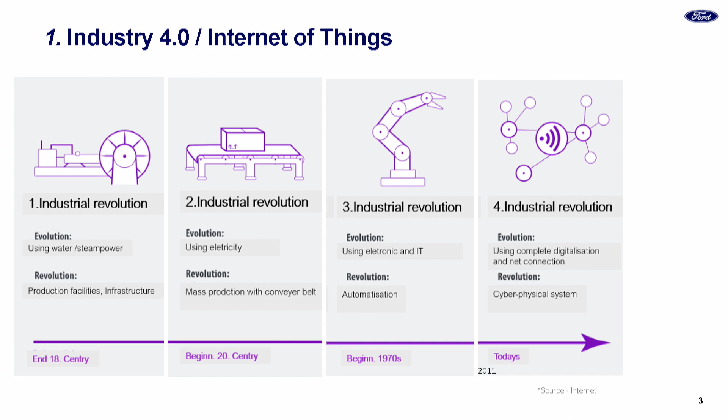Now the European Union is defining Industry 5.0. The background is industries are focusing very much on economical growth, efficiency, and productivity. But with time, we are recognizing there is something missing - where are human beings in that technology. And we are recognizing there are limitations of planetary resources and so on.

That's why the European Union defined Industry 5.0. Yesterday there were a lot of sessions with that definition, but to summarize it, Industry 5.0 is, in my opinion, not really a technical revolution, but more complementary to Industry 4.0. We are defining the focus areas.

So the first focus area is sustainable - sustainable leads actions on sustainability and also respects planetary boundaries. The second focus point is human-centric, meaning it promotes talents and diversity and empowerment to the people. And the last focus area is resilient - that means resilient, agile, with flexible and adaptable technologies.

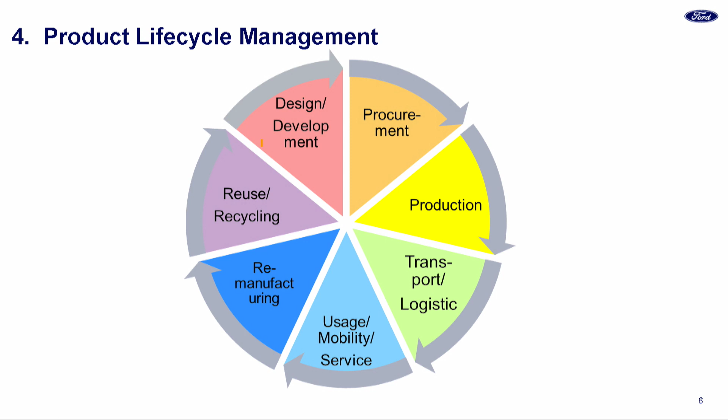Now let's speak about the product lifecycle. If we talk about the product lifecycle, we are starting design phases - 11 o'clock direction if you see in the circle. So we are starting design of the vehicles, and parallel to that is running the procurement. And if we produce the vehicle, and the vehicle is transported to the customer, that's the blue color now, and then if the customer uses the vehicle, the parts are remanufactured or recycled.

That's closing the cycle. So during this lifecycle of the vehicle we have a lot of data, but we are not using this data completely. It is not even connected, those data. So if we can connect those data at each lifecycle stage, we can have a lot of benefits and have a very robust product lifecycle management.

So there are some practical examples I will go through - generative design, and also in the production phases, AR, VR, different things, and different technologies, especially AI and blockchain or wireless communication that go through the whole lifecycle. So let's start with the example of generative design.

What is generative design? Generative design is autonomous geometric design after specification and constraints. There are three categories: first is topology optimization, second is biomimicry, third is morphogenesis.

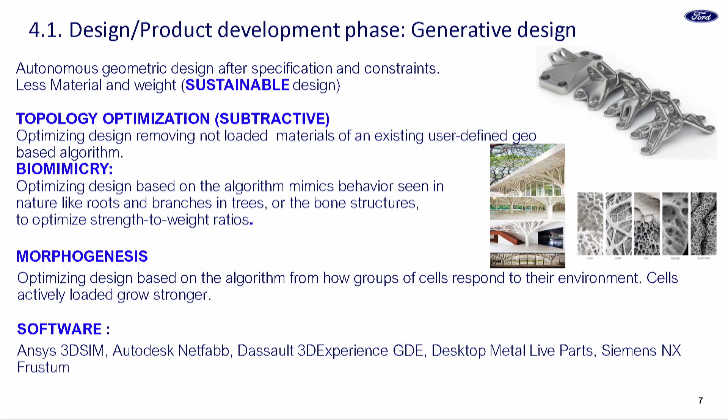And the second example is biomimicry. Biomimicry is optimizing our design after nature's behavior - it's like tree or leaf structures, or bone structures.

And the third category, morphogenesis, is a little opposite to topology - we are adding material if the area is loaded. So it's more additive rather than subtractive. You can use different software, listed at the bottom, and then you can create these designs. Because this design uses less material, it is very sustainable.

But these designs are sometimes very difficult to produce with our conventional production method. So now that is where additive manufacturing comes in. 3D printing, we're talking about here first.

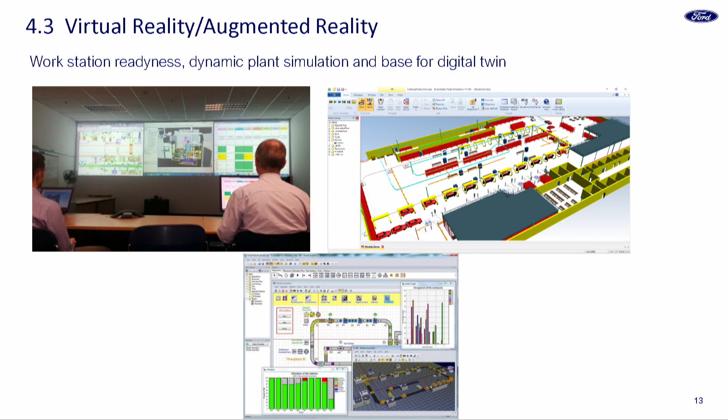And this is all the basis to make a digital twin. I will quickly go through it - it is a very complicated process, but it will need also, each process has some iterations.

I started with what is required in the digital twin. Digital twin requires a complete and granular virtual representation of the actual thing. So how do we do it? We're talking about a lot of digital twins, but generally we can have the product digital twin, we can have a production digital twin, and then after that we have the vehicle digital twin, how our vehicles are moving on the street.

So I'm focusing here more on product digital twin, but normally before you can do production digital twin, you need to have product digital twin. So if we have a virtual product - CAD models, everything - then you have simulation, and you are testing the product and verifying your virtual model through testing.

But parallel to that, you need to make sure this product you are testing, you can produce it. It is high level - you're doing production testing and also simulation. Then you have 3D factory models where you want to build your factory, and then verify the production simulation you have done, assessing it at a high level. You also get models from the supplier, the machine dynamic models. You put that all together, along with whole process workstation analysis, and then you can get all the digital twins, dynamic digital twins, as a virtual model.

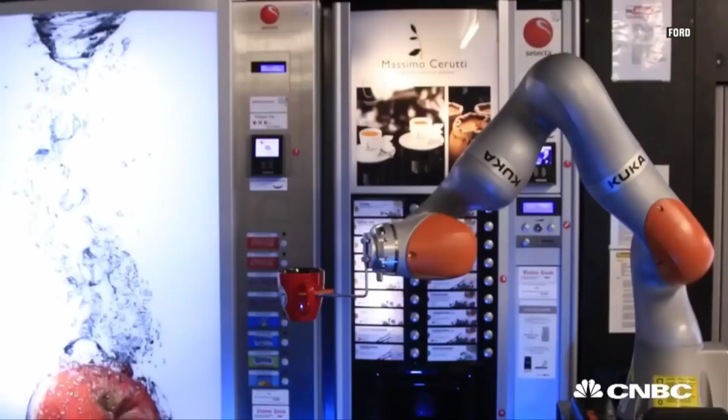And so even they can drink coffee together.

Okay, the next example is our AGV at the Valencia engine plant. Eduardo is also here, so this example we will show you.

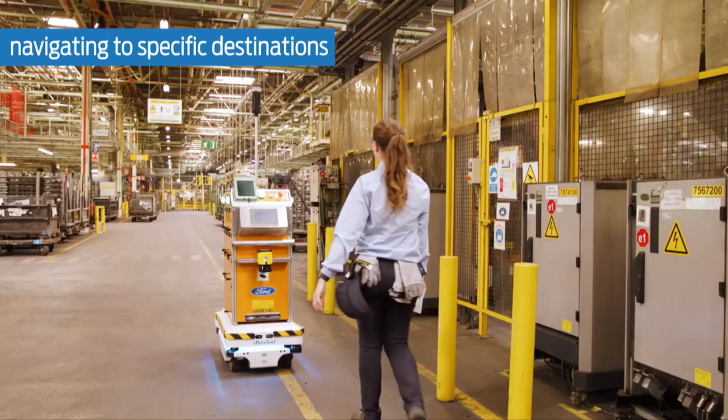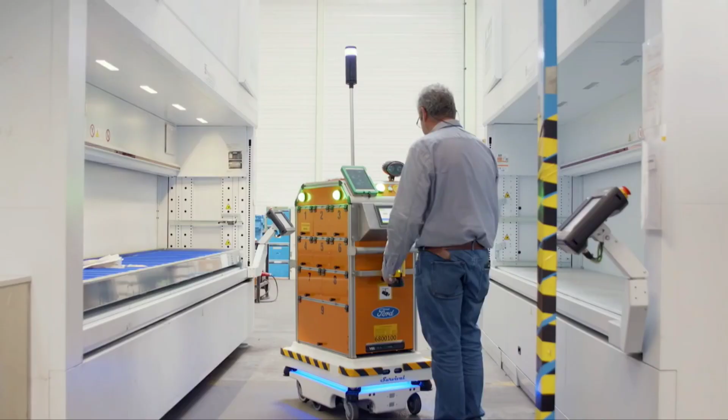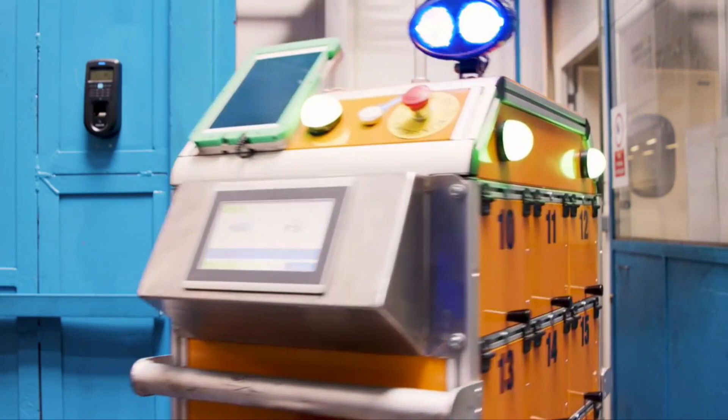Okay, then we have an example - the drone, which is applied to the Dagenham engine plant. What if you could do potentially dangerous but essential tasks absolutely risk-free?

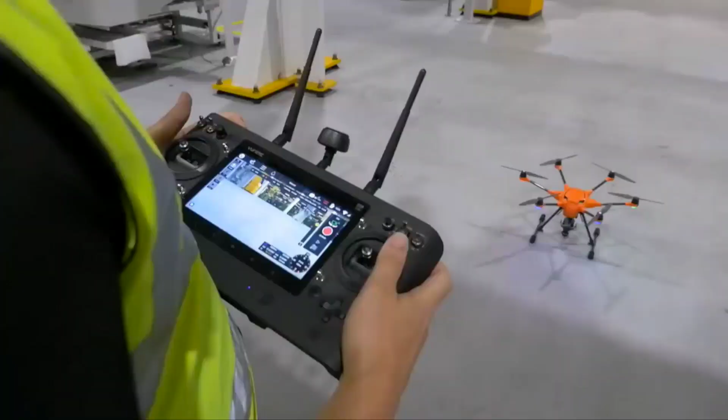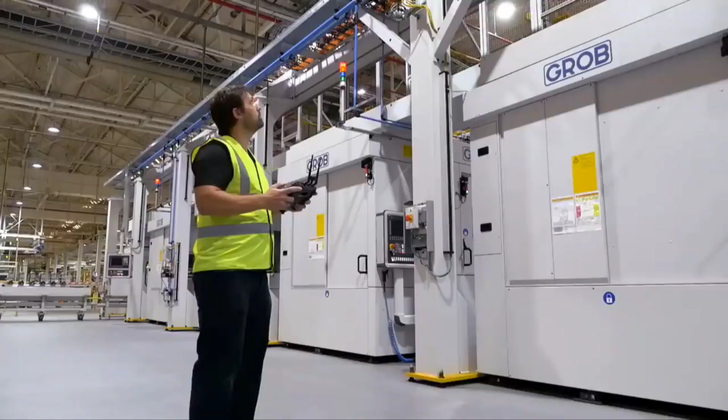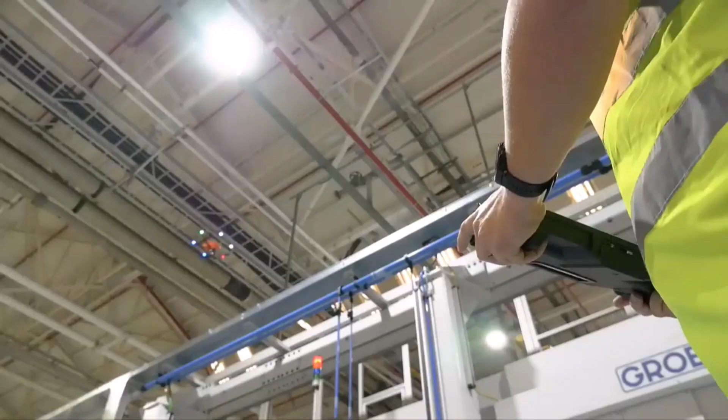A group of Ford workers are flying drones around their factory to do just this. To carry out vital safety inspections of high-up or hard-to-reach places, Dagenham engine plant workers are using drones with cameras to safely and efficiently inspect machinery and roof areas. We wanted to take the risk of these inspections away from the employee. By using a drone, we can do that. Previously, staff had to climb scaffolds to check 40-meter-long overhead gantries. Now, maintenance staff can zoom in on each area with feet firmly on the ground. The whole production facility can be covered in a day by controlling drones equipped with GoPro cameras to thoroughly inspect each area, ensuring they're well maintained and comply with rigorous safety standards.

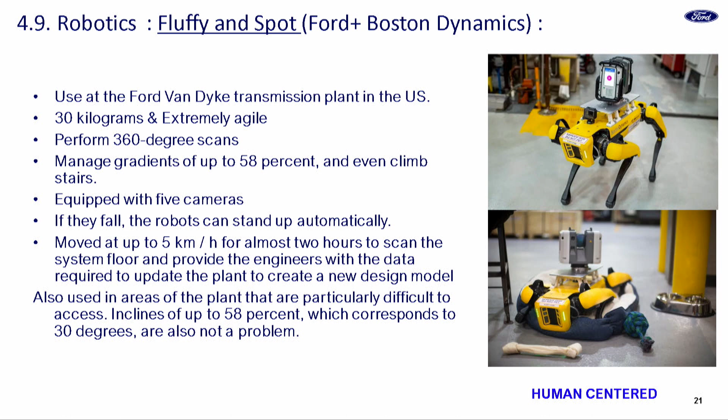Okay, then we have an example which we applied in the US, a cooperation with Boston Dynamics.

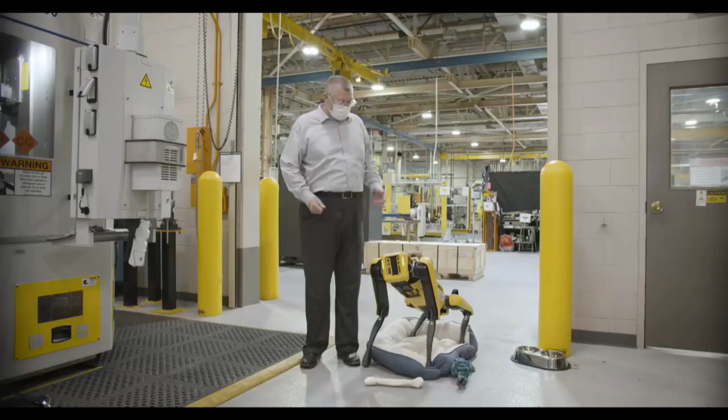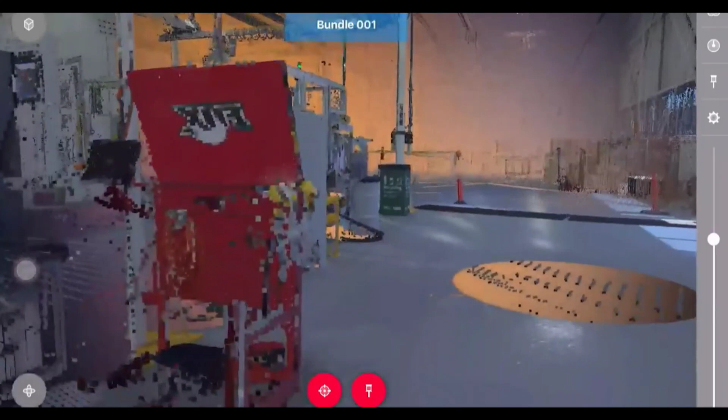Busy day at work. Fluffy, come here. Good dog. I'm Mark Goderis in the Advanced Manufacturing Center here at Ford Motor Company. I'm the Digital Engineering Manager, and I'd like to introduce Fluffy, our quadruped robotic dog. This is a Boston Dynamics Spot - we've nicknamed him Fluffy, and we're utilizing it to actually do laser scans of our facility. That image is then utilized by our engineers to develop new vehicle programs, and it allows them to develop a more accurate layout of our facilities.

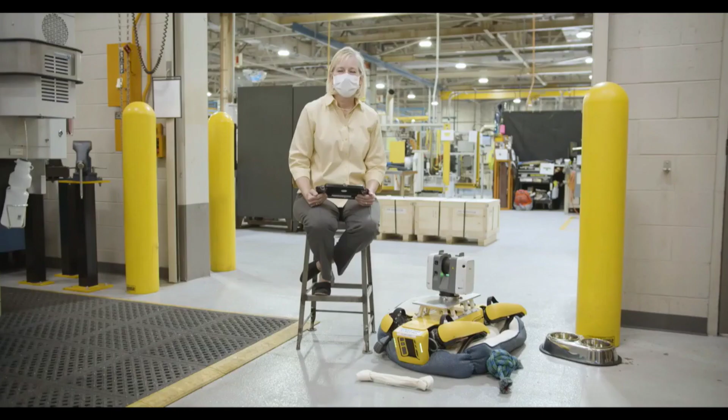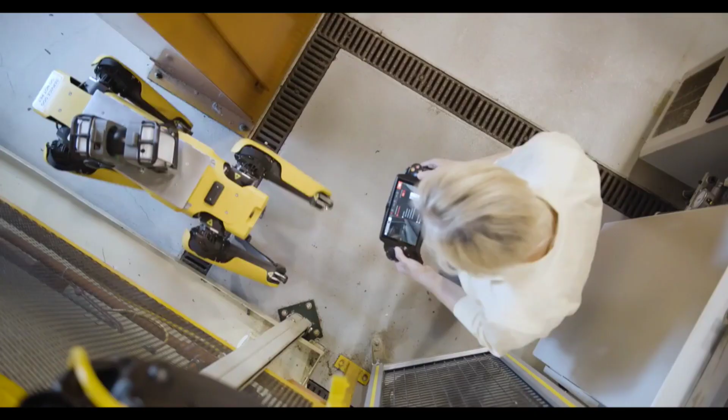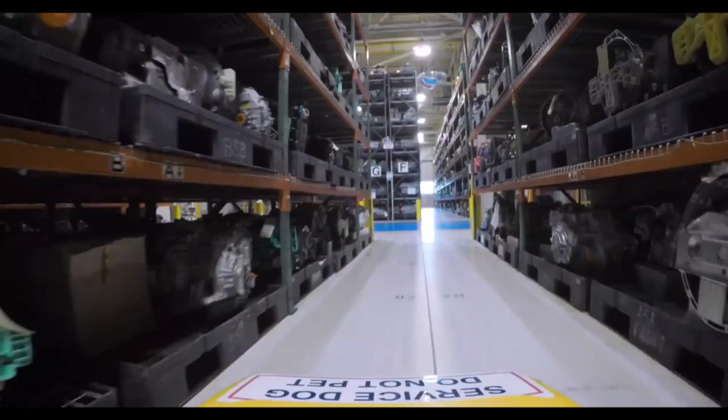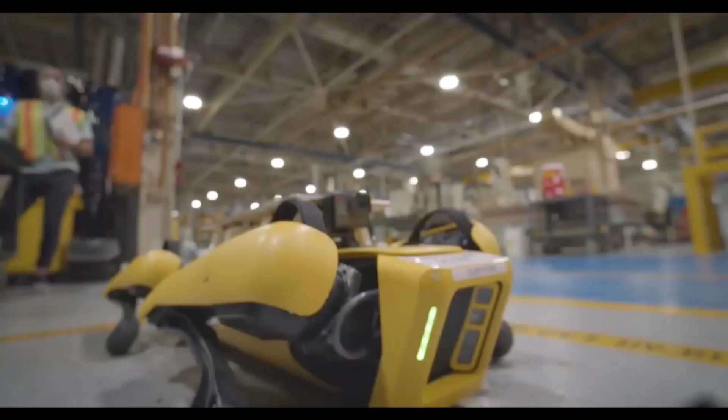These cutting-edge technologies allow Ford Motor Company engineers to save money, retool facilities faster, and bring new vehicles to market sooner. Hi, my name is Paula Wiebelhaus, I'm Fluffy's handler. Considering I'd never had a game controller in my hand before I received Fluffy, at first it was kind of intimidating to be in control of a dog that is this high tech, but he is easy to operate and he maneuvers well through spaces. He'll go into some tight areas that Scout, our other robot, won't be able to accommodate. I have never owned a dog before in my whole entire life, so this is our first entry into dog ownership. Like people bond with their cars or certain tools in their workshop, I certainly have bonded with my companion dog, Fluffy. Fluffy definitely has a coolness factor. So it's been amazing to be able to take something like Fluffy and turn it into a usable engineering tool for our company. The opportunity here and what this robot dog can do is significantly going to change the engineering community. It also gets people excited about the fact that we're on cutting edge technology here at Ford Motor Company.

Okay, then we have the blockchain examples. Blockchain is used at the beginning in Bitcoin. In the blockchain, all participants in the value chain approve their ledgers. It is like a fingerprint of the product. So the advantage is very clear and safe documentation, but it still needs a lot of computer capacity.

So the pilot we are doing is AI combining the blockchain. Here we show an example, from the raw material through tier 3 to 4 suppliers, to us, then dealership and the customer, and the end of the life cycle. So an example, batteries - we can follow exactly the origin of these raw materials, and for example the CO2 footprint can be done this way. So the data is transported, only the necessary data, through the whole life cycle.

And then we have the 5G example, in Dunton.

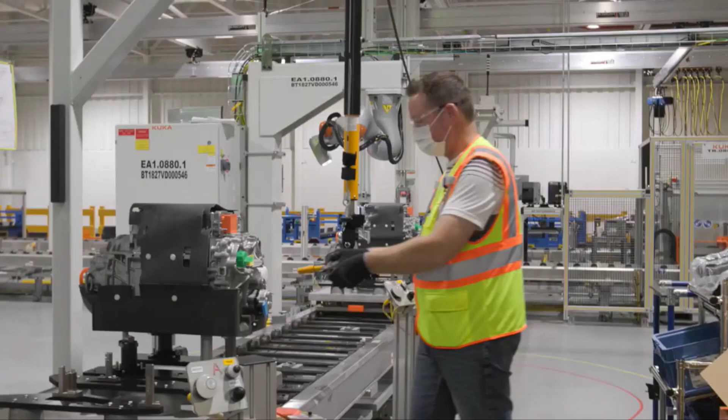In terms of the adoption of plug-in and fully electric vehicles, we have to very rapidly redeploy all of the assets that we've got into factories that can make low carbon vehicles by 2030. The factory of the future is all about moving data, and 5G is an enabler for that.

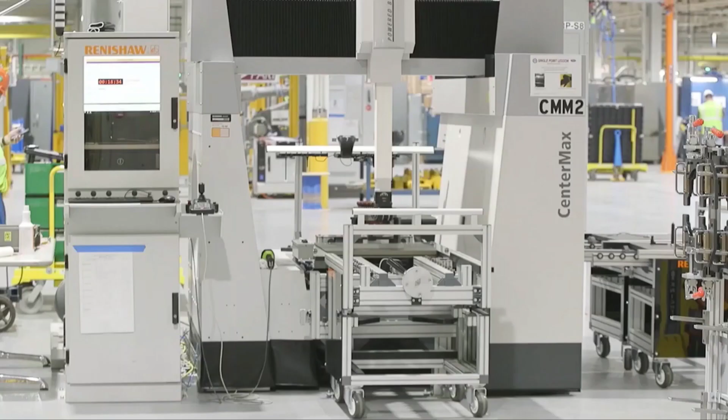Ford has a long-standing partnership with Vodafone. Building a pilot line with 5G was a great opportunity for us to look at the technology, understand the technology, and without this learning we wouldn't be able to consider doing this in one of our plants.

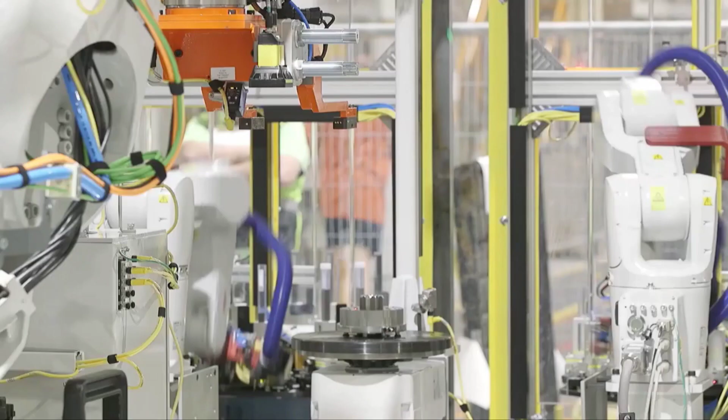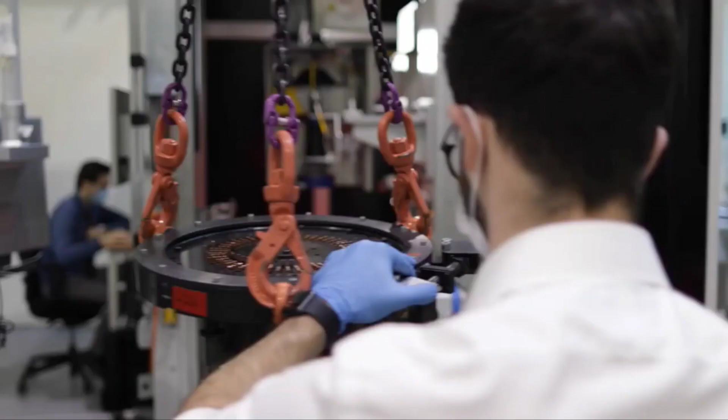One of the use cases here in Dunton, using the Vodafone mobile private network, is on our welding machines. We're capturing images before welding and then after welding, and then we can use AI and feed back to the machine if the weld isn't particularly good, and change and re-weld whilst the part is still in the machine.

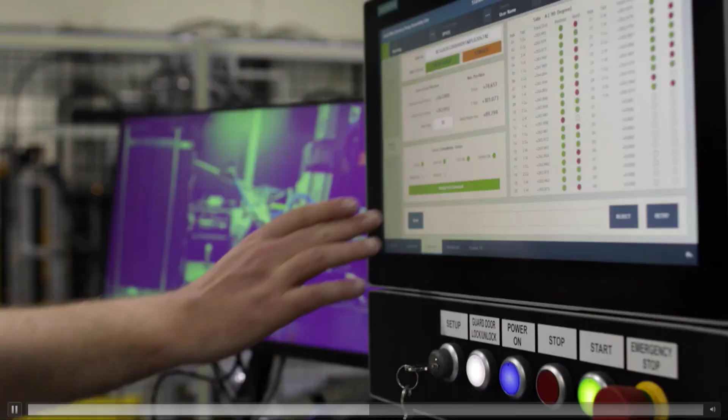You could be welding and creating terabytes of data very, very quickly. So it's important that we have the connectivity that can keep up with that, and that can send that data and store it as quick as we're producing it.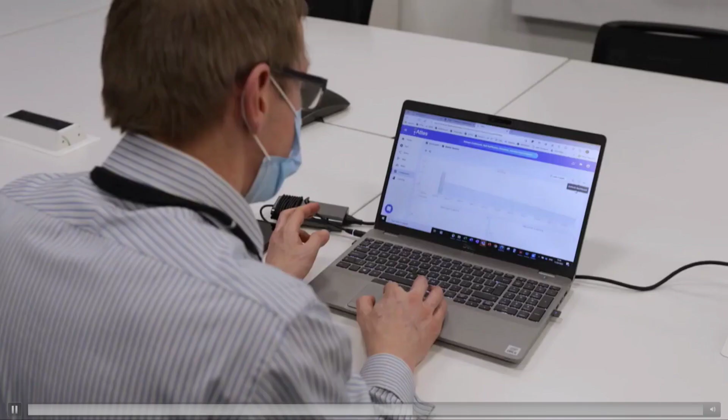We've been able to see data back from the laser process that tells us that we're getting a buildup of heat in our lenses, which means that we need to replace them. We could then contact an expert to discuss it, but we can also use the 5G network in conjunction with a HoloLens system to guide an operator through the process of changing that lens.

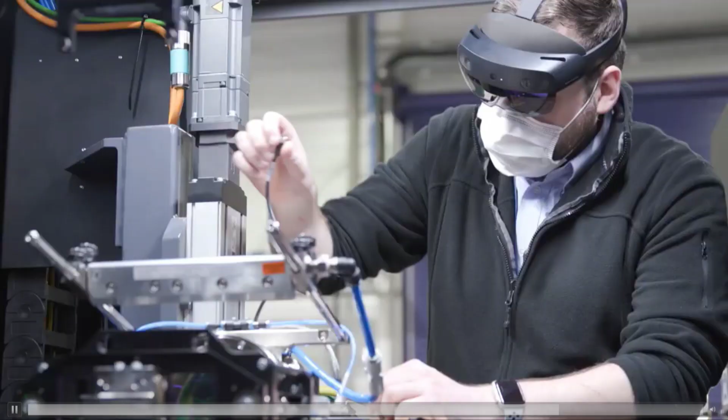We're keen to make sure that we can connect securely, and with 5G you have the ability to use SIMs on every single device and make sure you're aware of every device communicating on your private network. We've got plans to totally transform our vehicle lineup over the next 10 to 15 years.

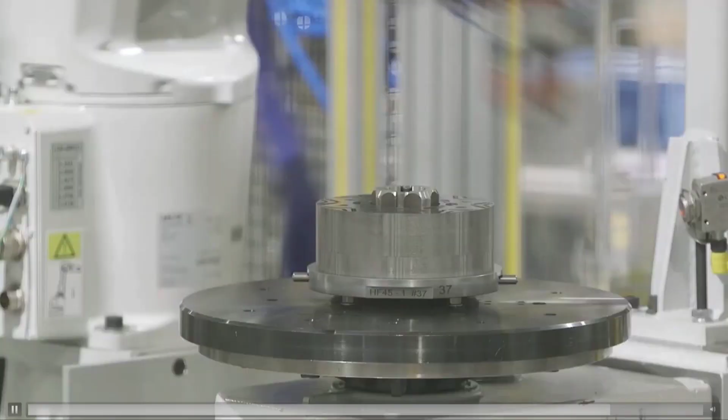The manufacturing engineering team are at the centre of the change of EV powertrain in Europe, and this team needs to work with people like Vodafone so we can do that as efficiently as possible.

Okay, to summarize, how the factory of the future looks like if we apply all these technologies. First, we will have the planning and execution with real-time track and trace.

So as a customer, you order the vehicle online, then you can see it in the planning phase, or already in the body shop, in assembly, and you can see everything, and also get the delivery time. So it's all connected, and there will be self-monitoring and self-adaptive logistics using different technologies.

And also in the intra-logistics, smart shelves, or autonomous driving in the factory, and the inventory is monitored, and if there is less material, then it's ordered automatically. Wireless communication is also part of this.

And in production, we will have AI optimized, built, and flexible integrated production planning and execution. So predictive maintenance and predictive quality, which will lead to near zero failure and high efficiency.